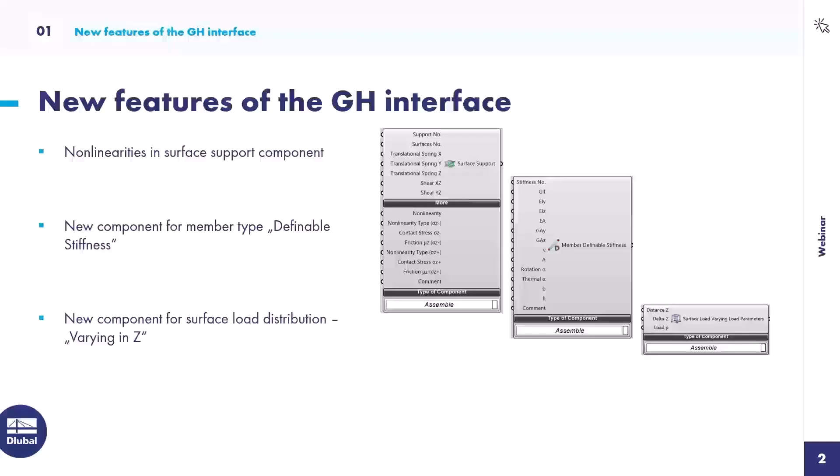The third component is a link to the surface load component. We extended it with the load distribution varying in Z direction. So in case you have to apply a hydrostatic pressure on a vessel, that would be the load you can use, because you can insert varying forces in the global Z direction. We also created a new component for rigid links. All of those features were wishes from customers, so we try to cover them as good as possible.

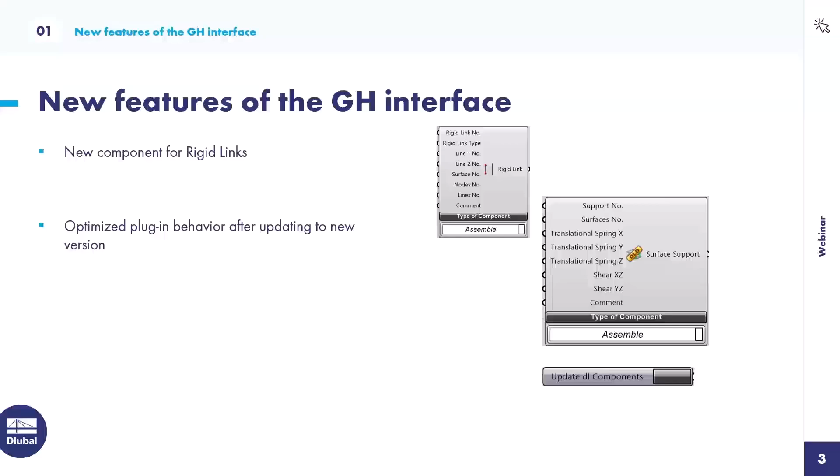And the last feature, in my opinion the biggest one and the one that I'm personally looking forward to, is an optimized plugin behavior when a new version of the plugin has been installed. This is relating to the fact that when you opened an old Grasshopper project with a newer plugin version, it could happen that the connection wires were disconnected, at least for some components. That was caused by the fact that we constantly extend current components and create new components, and when we extend an existing component, those wires have been disconnected, and this new optimized behavior should prevent that.

You get an old tag, you get the previous component shown, you have a new component where you can run an update of the components, and still the wires should remain intact. So that's a good feature for such cases. All right, now this will all come in the next days.

Now let's hop into these sample files. Let me introduce them briefly. As I said, we offer those sample files as download on the webinar page. So you can download them and use them for yourself.

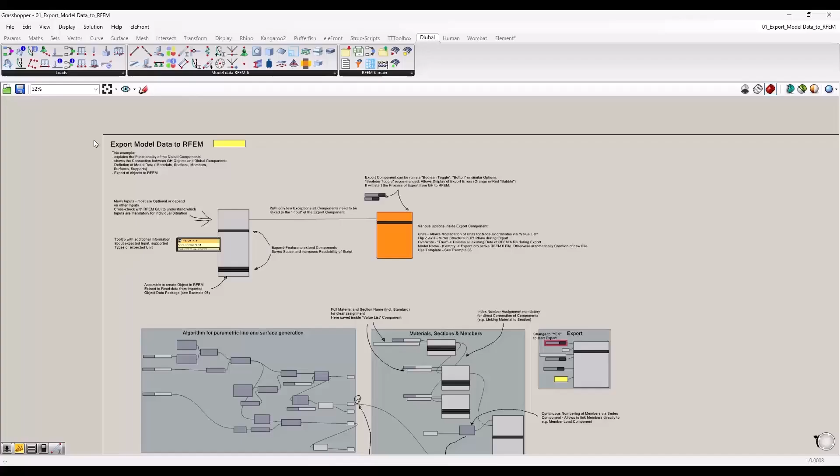Okay, I will open Rhino and Grasshopper and start with the first file. So yeah, this is how these sample files look like. As I said, I'm going to start with the export of model data to RFEM. Maybe before we dig into that, a brief introduction of the plugin itself for those who haven't seen it before.

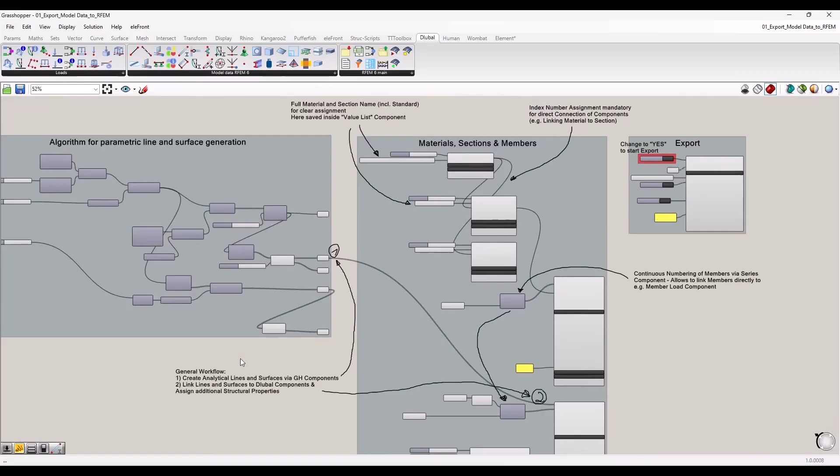You can download our plugin via the Rhino package manager. And after the installation, you get a new tab here, the Dlubal tab. And this one is divided into 3 chapters: the model data components, load data components, and general components. I will focus now on the center group here in this example, and start a little bit with the explanation of how our components are set up, and then also with an example so you can check it, modify it, and so on.

Regarding the introduction of our components, I left some comments in here. In general, our components work similar to other components that you know from Grasshopper. We have inputs, we have outputs, usually just one, depending how you use them. And it depends a bit on your use case what inputs you have to fill. I can't say you always have to use this and that input.

It depends. If you plan to export a tapered member from Grasshopper to RFEM, then you need the Grasshopper line, the section distribution input, section start, and section end, for example. If you plan to export a rigid member, the member type rigid, from Grasshopper to RFEM, then you only need the member type input. So we can't say this is mandatory, this is optional. Here my tip is check the RFEM graphical user interface, what is requested there from you, the user, and then fill the same inputs in Grasshopper.

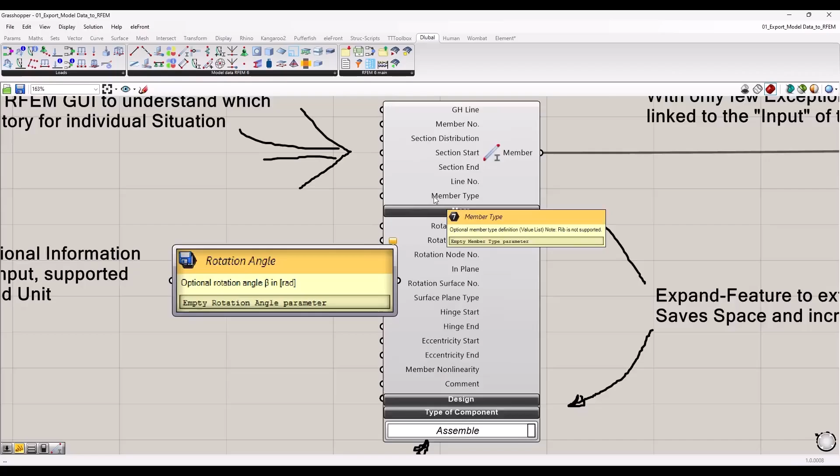We try to give you additional help via the tooltip. So whenever you hover with your mouse over an input, you get additional information. Those tooltips contain information about the expected input, supported types, expected units. For example, for the member type, you could ask what is a member type, what's the proper input for that, a string, a value, and then you can see here value list in the tooltip.

So you can call up a value list, a very often used feature for our plugin components. It will give you the list of options, and then you can simply select the one that you need. For the rotation angle, for example, you get information about the unit. So also check the tooltips as a quick help if you are not sure how to deal with certain input.

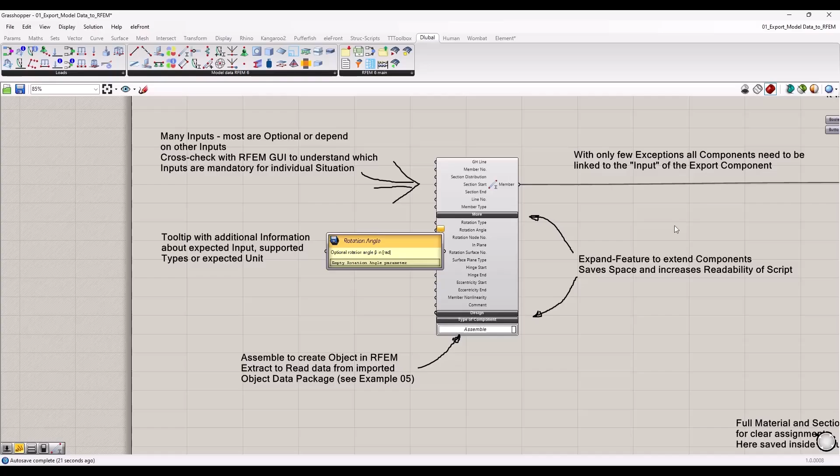We have also an expand and shrink option in our component. Here we have to say thank you to Bollinger Grohmann, Diego Apellániz. They provided us with this code. It's really appreciated and a nice feature because it reduces the space of the components if you only need some of the inputs. It's simply a nice feature.

Concerning the general setup of a script that has the target to export data, you would create multiple components. I have here one for members. You would need additional components probably for sections, for materials, maybe for nodal supports. You fill them with the information, and all of those components then have to be collected inside the RFEM export component. That's this one here.

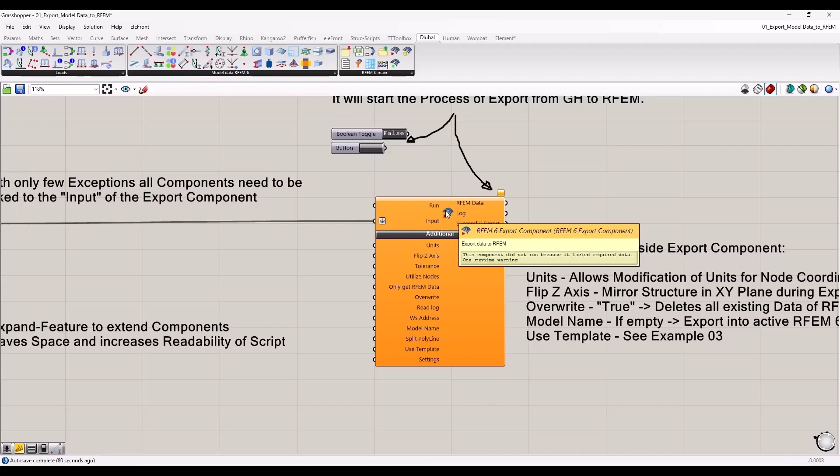All of the components are connected to the input, and then you can run the export by a Boolean toggle, a button, or similar options, which you connect to the run input. My suggestion is using a Boolean toggle. It has two pros. Basically, if you keep it true when you connect it, then you have kind of a live link. So whenever you change something, the export will be triggered again, and you get the result in RFEM directly.

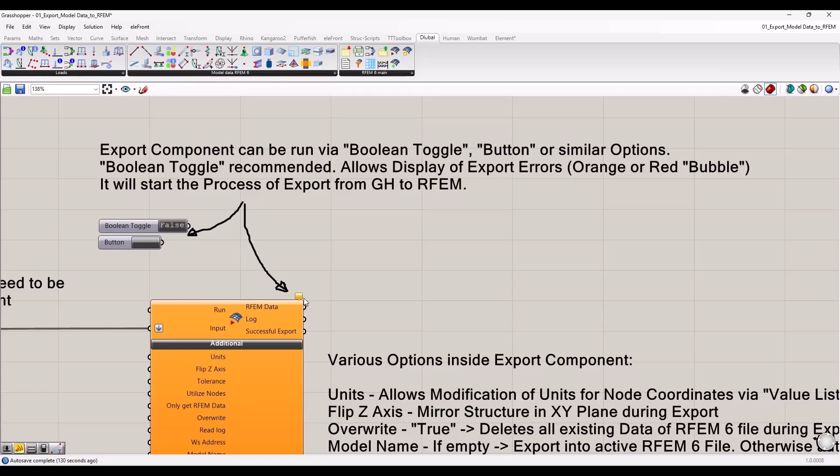And the other big pro is that when you made an error in the input somewhere in your script and you leave it on true, you get here usually a red or an orange bubble, as you can see here. And this one contains an error message. If you use the button, this error message will disappear a millisecond after it showed up. So that's why I prefer the Boolean toggle.

So far regarding a quick introduction of the components. Now we can take a look at this little example down here. Let me show what I did.

I have here a group which represents native Grasshopper components, basic in the Grasshopper program. I create just a little structure, a couple of columns, a slab with an opening, and I collect all of these objects in surface, curve, and node or point components, which I will use later in my Dlubal components.

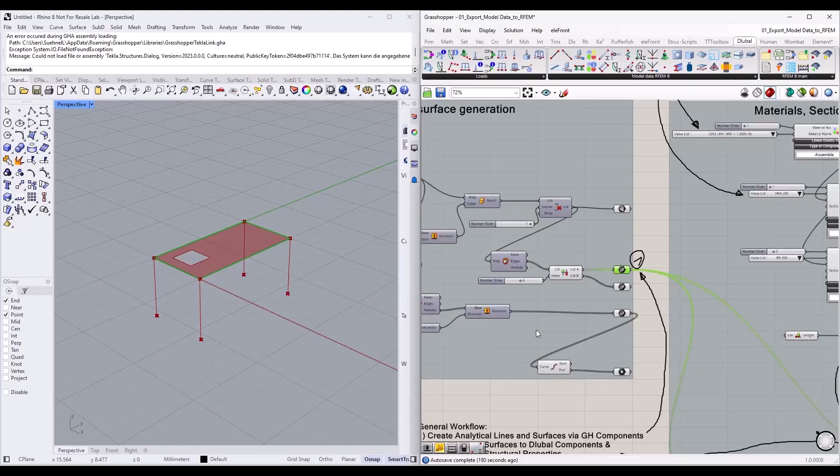How I do that, I will show in a second. If you take a look at the member component, it makes sense to use the lines we just created via Grasshopper as the analytical line, basically start node and end node. So what I'm doing is connecting this curve component with the member component, with the Grasshopper line input.

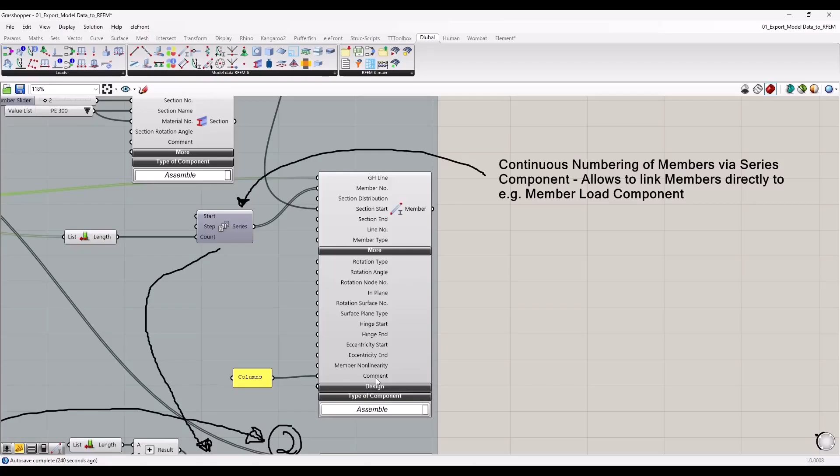Then you have additional inputs to assign the required and necessary information. What section do you want to assign onto that line? Maybe you want to assign additional comments or even eccentricities. That can then be done via direct inputs or additional components.

I also create here a material and a couple of sections in this little example. We often get the question, will you provide a library for the materials and sections as a component? We actually decided against that. The library in Rfem contains hundreds or thousands of materials and sections.

So we don't see the point of having such a component in Grasshopper. It is quite easy to create your own little library.

I'm using here a value list in that little example. You can edit the value list. You fill in - let me use this one here, that's better - you fill in the short name that you want to see when you open the drop down, and then the full name that is expected by Rfem.

The full name usually contains also the standard. So if you document it in that way, you have a nice little library where you can choose those materials that you frequently use.

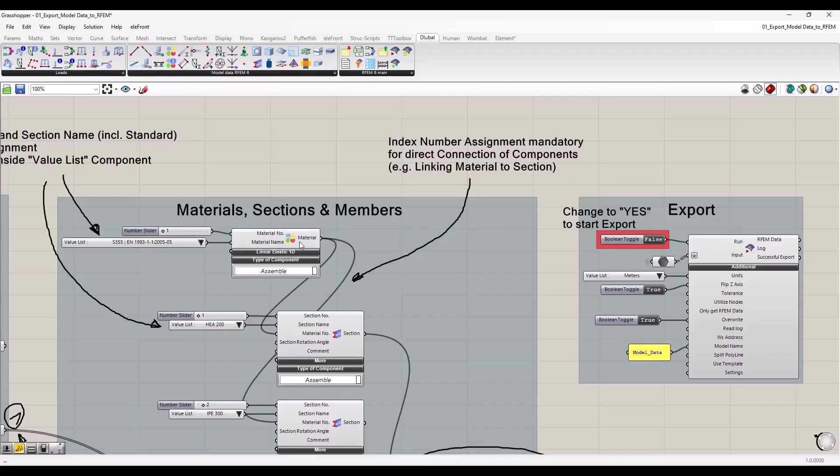Small tips like that are mentioned in these sample files. An important information is also shown here. In my webinars about the Grasshopper interface, I usually connect my components directly, material into the section component, because the material index number is a required input. So it is just logical to connect them.

This connection, however, only works if you assign the index number to the material, because the input expects a value 1, 2, 3, 4, 5 - the index number of the material. This information can only be shared if it is assigned beforehand. That's important - keep an eye on the index numbers of the components.

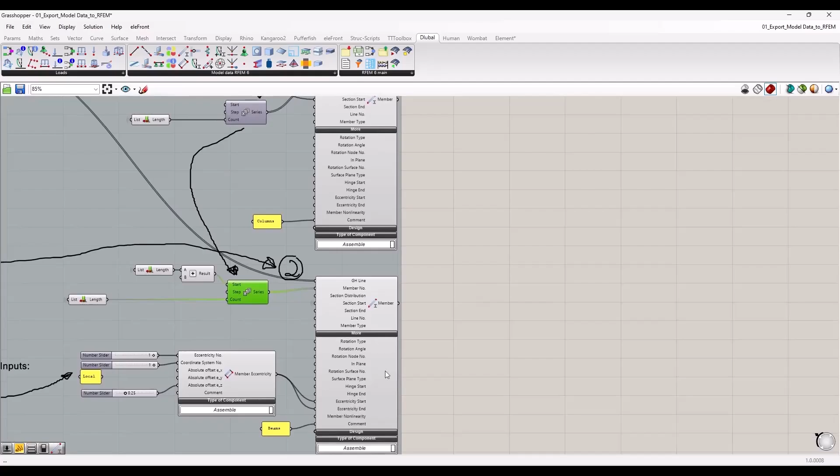It is not that difficult, even if you think about members where you have maybe hundreds or thousands of index numbers. You could use a series component, linked to another series component for additional members, to count the lines you have collected and assign numbers to that. That's quite easy.

That example also creates a couple of nodal supports, thicknesses and surfaces, with additional information on how you can trigger a fixed support, for example. And at the end of the example, we have the export - highlighted in red, the button that you have to press to start this whole example. As I said, a Boolean toggle.

This is what I want to show here as well. Let me quickly run the export from that little file to Rfem. I double clicked on it, and now the programs will communicate with each other. In a second, I should see the result.

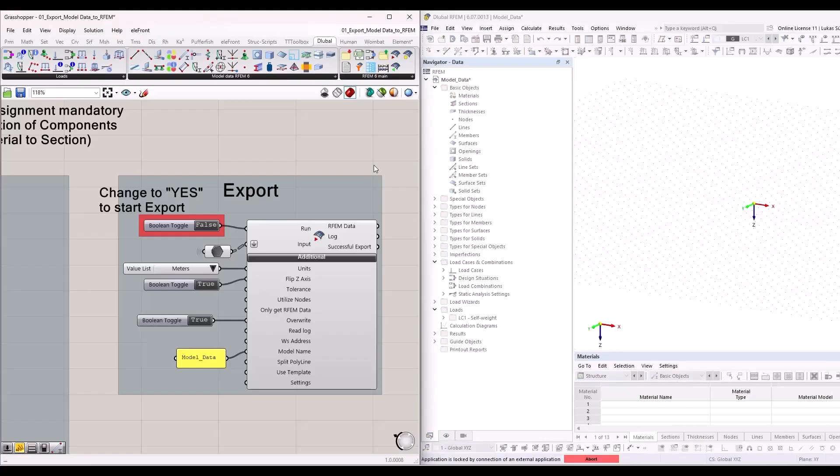Okay, here we are. I stop the export again - I set it back to false. With that, I make sure that whenever I change something, it will not automatically trigger the export again. As you saw, it takes a couple of seconds, and you might want to modify more things before you run the export. That's why I set it back to false.

You can leave it on - that is up to you. And as you can see, the result is clearly visible. We have the same little structure. I have here eccentricities assigned on these members. As I showed before, materials, cross-section, everything has been exported correctly.

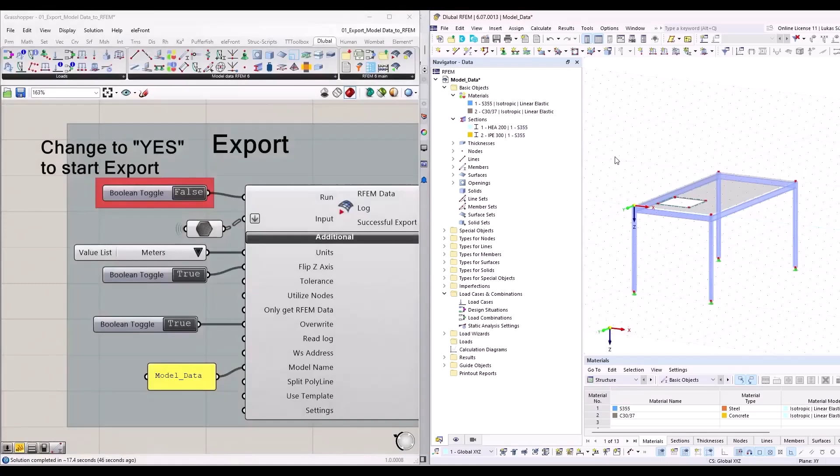The nodal supports - so that is the first little example that I wanted to show here, the export of model data from Grasshopper to Rfem.

All right, let's have a look at the second little sample file, which is about the loading. I could have done it in one, but if you begin with the interface it feels a bit complex, maybe too much information in one file. Therefore, I split it up into two sample files. So that's the one for the loading. I will increase the size again a bit.

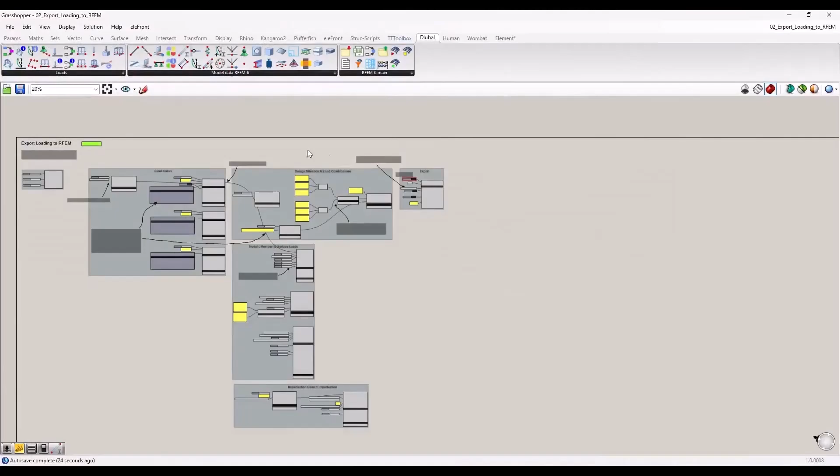As a quick introduction, what we cover here in our loading chapter: you can create load cases via the Grasshopper interface. After the load cases, you can also create load combinations and design situations - design situation, ultimate limit state, serviceability limit state, those types which are required as an input in the load combination. And then you can export these load combinations.

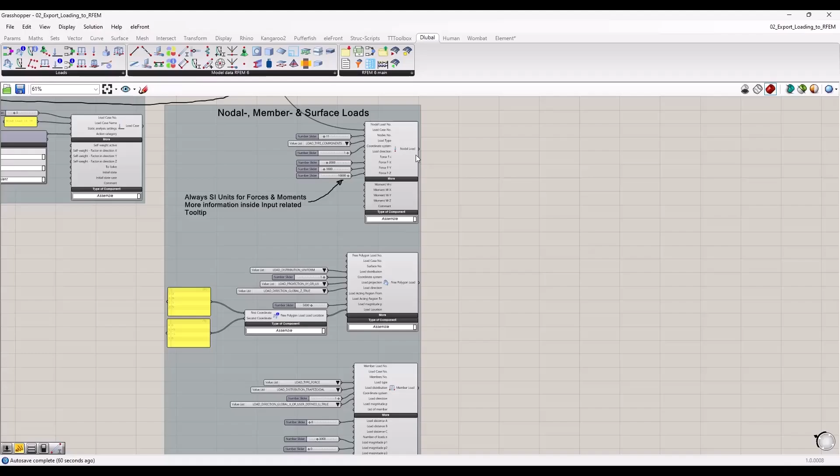Additionally, this sample file covers a couple of loads. Obviously, you want to create loads inside your load cases also in Grasshopper - probably up to you. And here we cover nodal loads, surface loads, member loads, line loads. There are more options here, I just use 3 of them in this little file.

And on the bottom, also a topic which should not be dismissed: imperfection cases and imperfections, initial sway on columns, pre-camber. Depending how you plan to run the stability analysis in RFEM 6, this might be necessary, and you can create it via this plugin.

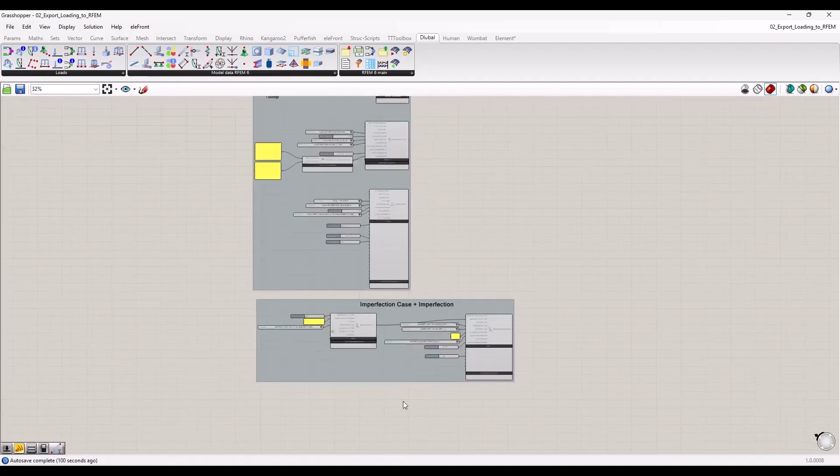So let's have a brief look at the sample file as well. Actually, this second sample file is an extension of the first one. As I said, I wanted to focus only on the load related data or info objects - that's what I wanted to focus on. The rest is still part of this script.

It's however hidden in that cluster file. So if you double click on that button or that icon, you see that behind that cluster we have basically the content of the first sample file.

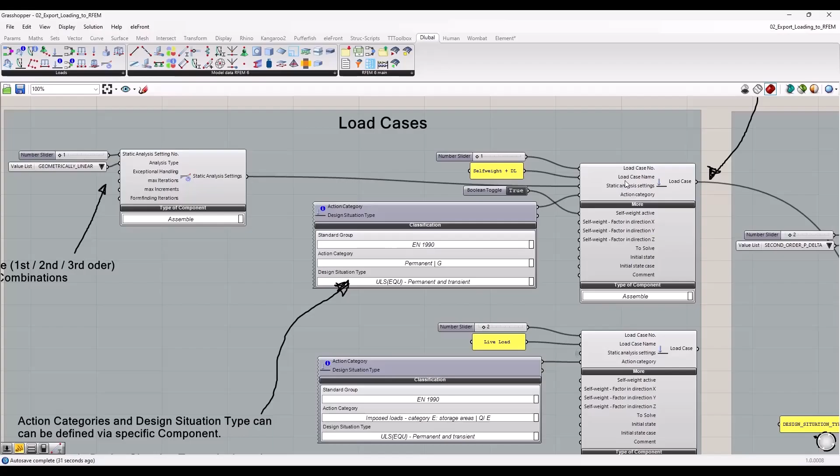Regarding the load cases, I think it's clear that we can create them via Grasshopper. Necessary information, important information, is the static analysis setting - should it be analyzed according to first order, second order, and so on? That's an additional component, it is shown here how you can treat it and handle it.

Another important input for load cases is the action category. Basically, is it a permanent load case? Is it a live load? In case of a live load, according to Eurocode, is it a group A, B, C, D, E live load case? There are different options that you can select via this classification component.

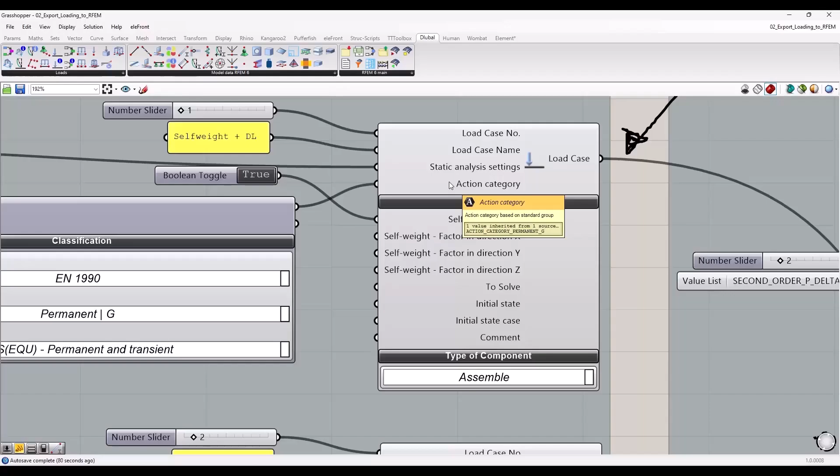It's like a little library, because the expected input for the action category is a relatively complex string text. You can see it here in the tooltip: action category permanent G. That is nothing which you know directly - you don't know how to input that. That's why we create these strings via this component.

This is how I set up load cases. I fill these load cases with loads, as I showed before. Here, maybe as a comment: any value that you have to input into our components usually is related to the SI units - so meters, Newton - as a simple example, most common stuff.

You cannot change these units into anything else, so this transformation can be done via a little recalculation if it's required. You can easily use a multiplication component, assign the proper factor to convert a pound force into, I don't know, kilonewton related unit, or SI related unit. So that can be done in Grasshopper, and here as information we always expect SI units. I documented it again in the tooltip, as you can see here - Newton, or for moments Newton meter, for example. That's also why I'm using high values here, 2000 Newton for 2 kilonewton.

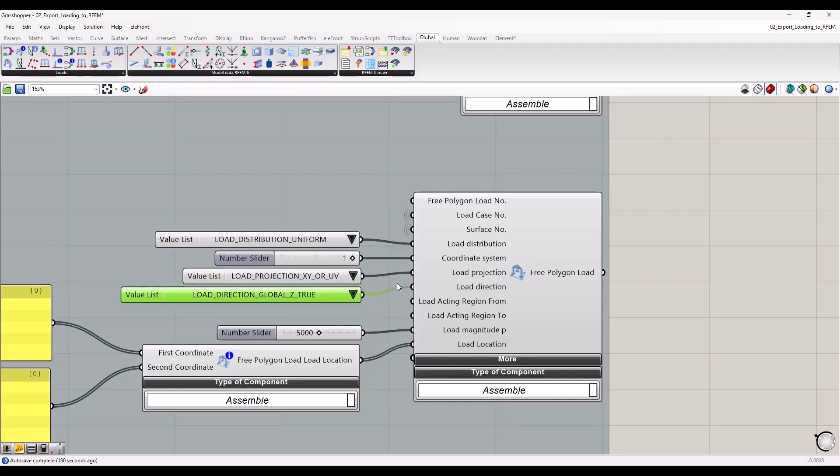Also, I hope it's obvious - if you deal with the load components, we use a lot of value lists here to define the proper load. There are various ways how to create a load, and most of these inputs can be defined via value lists. All right, so far regarding the loads.

The load combinations can be built manually via our plugin. This component is basically divided into subcomponents. We have the general load combination component.

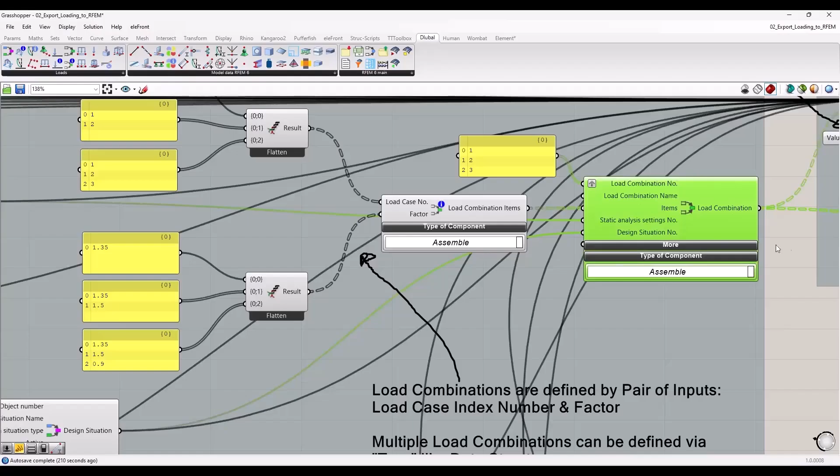Here you can assign the static analysis setting, you can assign a name, you can assign the numbering, and more settings as well. The actual combination is done in a second component, the load combination items component. Here you combine the load case index number, so load case 1, 2, 3, depending which numbers you assigned to your load cases.

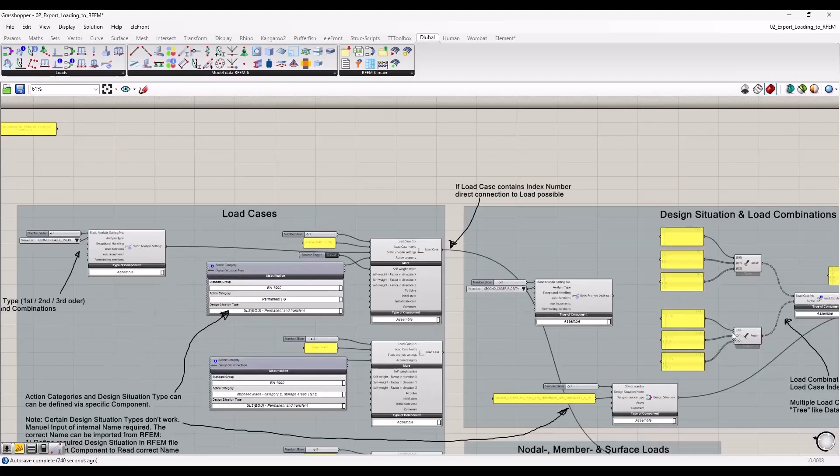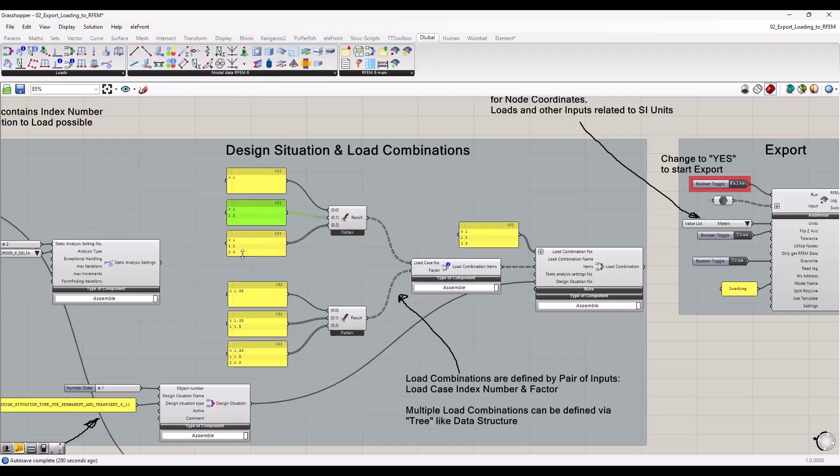You combine that with the factor, 1.35, 1.5, 0.9, whatever is needed, and this combination can be done via little lists. The first load combination that usually comes to mind is dead loads multiplied by a factor - load case number 1 multiplied, based on the Eurocode, with the factor 1.35. The next combination is dead loads plus live loads: dead load case number, live load case index number, 1.35, 1.5. That's how you set up multiple load combinations via Grasshopper.

If you have all that, you can connect it again to our export component, same logic. Here I used a little data component in front simply because, to connect these components, sometimes you have to zoom out and draw lines from here to here. So I have this little data component which I move to the place I need, for an easier connection. That's all about it - it's not required to do it this way.

Let me also show that export. Again, we run the export by double clicking on the Boolean toggle. Wait a second. All right, export is done.

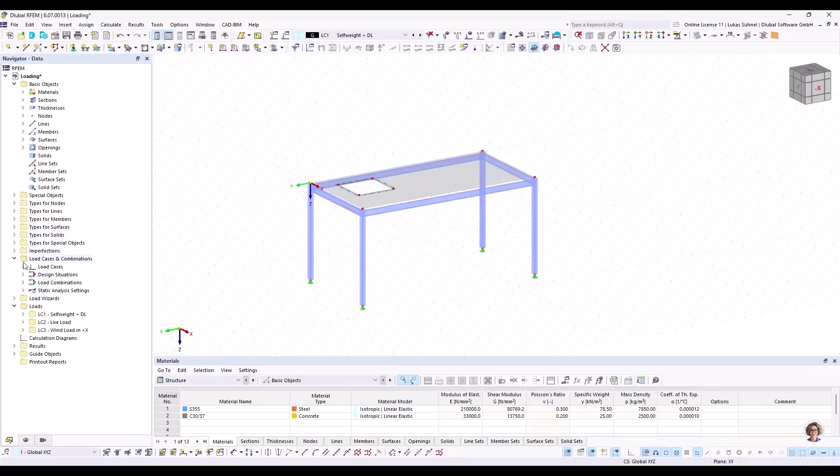Let's have a look - same structure. That was all part of this cluster file. New is the load cases, the design situation, the load combination - this has all been created via Grasshopper. Also the imperfections, as we see here, or the loads, node load, surface load, and also wind load as an example. All right, so far regarding the second sample file.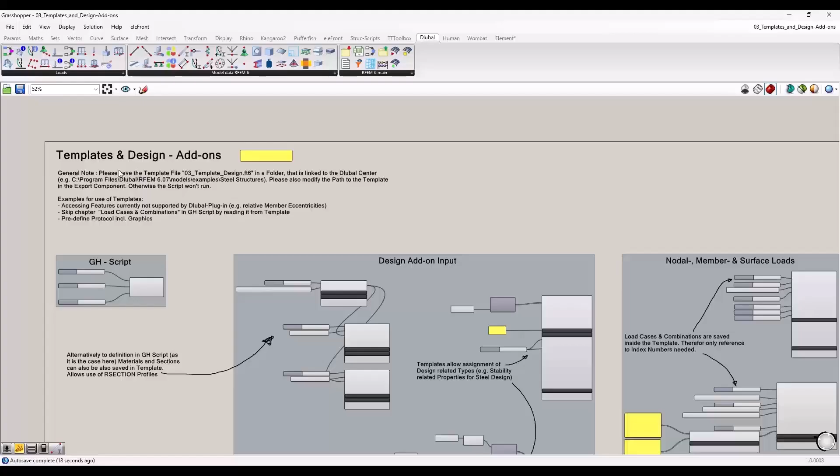Now let's have a look at the third one. The third one is about using templates and how to control the design add-ons. So the first sample file showed how you can export model data, the second sample file showed how to export loadings. I think it's quite clear what we can do in general, what features we cover here.

Now templates is a complete additional topic, I would say. It's really a strong feature which you may or may not know from RFEM 6 or previous versions. Let me show it maybe in advance. Think of the following example: if you analyze or design the same kind of structure again and again, maybe you have the same kind of load combinations, or your protocol always looks the same, the same graphics are included and so on - then you don't have to do it every time from scratch. You could use a so-called template.

You create such a file once, so you would create a new RFEM file where you define all these settings and properties that you want to save in such a template file. Then you save it as a template, and whenever you create a new file afterwards, you can refer to that template. So basically you create an empty file in which the information from that template file will be imported. Let me show that as well. As a result, your file is not empty anymore - you get these load combinations, the protocols, maybe even materials and cross sections, whatever comes to your mind that you want to have as a default in a new file can be saved in a template, and that will be imported afterwards. Takes a moment.

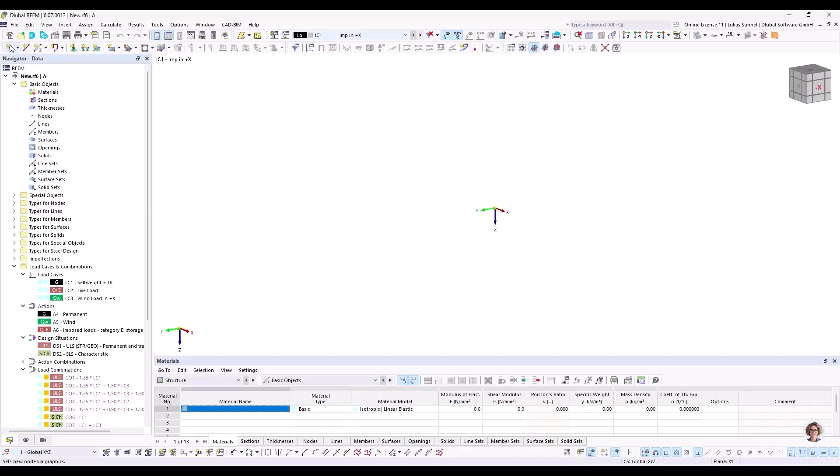Little spoiler, it contains graphics as well. So yeah, that is a feature that we can use manually in the RFEM graphical user interface. And we also have access to that via Grasshopper. Creating such a template is manual work in RFEM, but once you've saved it, you can also use it in Grasshopper.

You basically just link the path to that template to our export component in the use template input. That's all you have to do. Then the template will be preloaded into the file that you create with your normal export. And one thing that is quite important for that workflow: you should not use overwrite during the export. That would overwrite the data that we import with the template, which makes no sense in that moment. So make sure to set it to false.

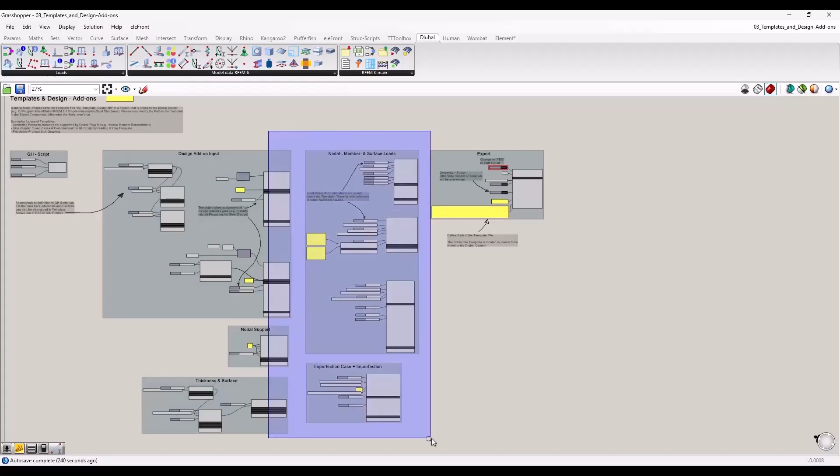And then you can use those types, the information that you have in the template, in your Grasshopper code. And how can you use that? Well, let's go back to the example with the load cases and combinations. Let's say you don't want to create these load combinations manually in Grasshopper, as I showed before. This whole chapter is missing in this example. I have some model data and some loads, but the load cases and combinations have been skipped. They're part of this template file.

And if I now create a new load, a node load, a member load, whatsoever, I need as an input the load case index number. Load case 1, 2, 3, 4. So all you have to do is assign the index number of the load case this load should be placed into. Obviously, this requires knowing which load case has which index number, but that is okay, I guess.

Where else could templates help? They can also help you access features that you can't control via the Grasshopper plugin. For example, currently our member eccentricity component only allows generating eccentricities with absolute values. In RFEM itself, I can quickly open a file, we have additional options. We can define eccentricities as relative. We could say the eccentricity should always be the distance between the center of gravity and the top flange or something like that. Let me show that in a second.

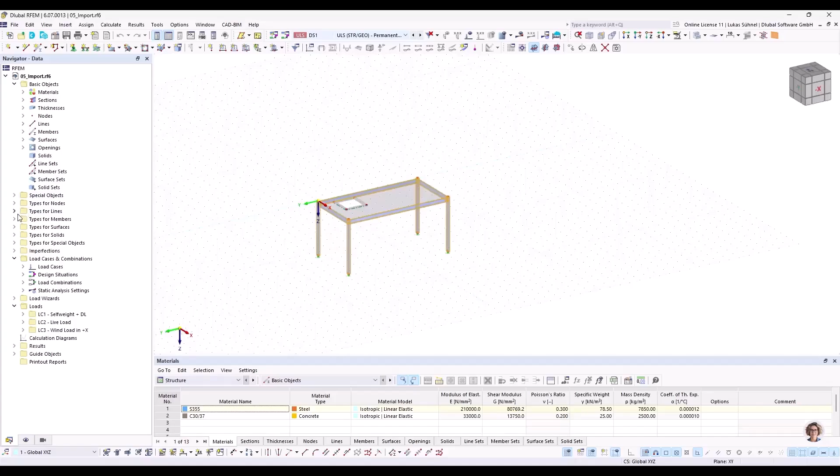Okay, if we think about member eccentricities, then instead of just absolute values, I have additional options in RFEM. I could, for example, create an eccentricity which is relative, so depending on the cross-section size, it will always take half the height as the eccentricity. And I can save these eccentricity types inside my template and then use them in Grasshopper. So instead of creating the eccentricity manually and assigning it to the member component, I could just assign index number 2, which is the relative eccentricity, to my member component. So templates also allow me to use features that are not covered by our current plugin.

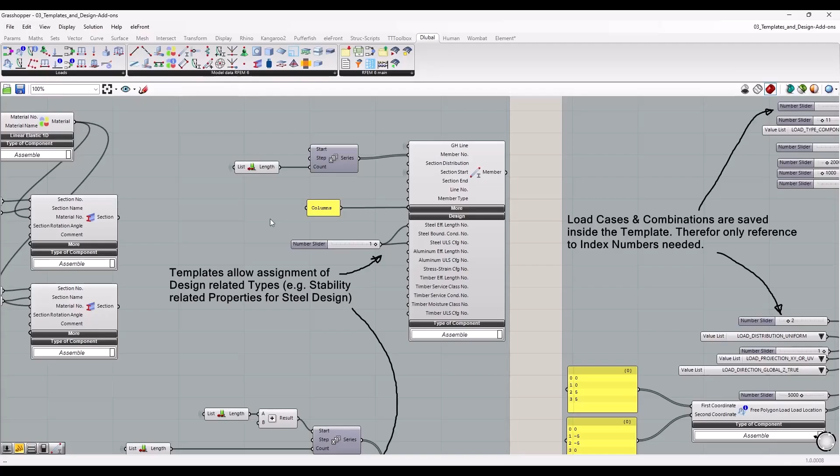Just another example, you could skip the whole generation of materials and cross sections. You can save them in a template and just assign the index number into the section inputs of the member, for example. And the last feature that I want to mention is the control of the design properties. Let me show that again in RFEM.

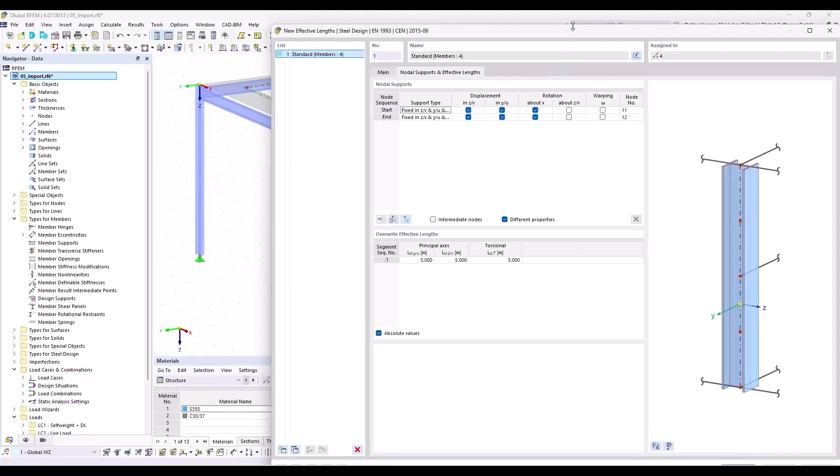Let's imagine we want to run the steel design in RFEM afterwards. For the steel design, we have to define additional properties. What's the buckling length of the column? That's a property inside the member dialog, design types. Here I can say perform flexural buckling, lateral torsional buckling, and so on, all these checks. And then use as a buckling length, maybe length XYZ, 5 meters. These inputs are relatively complex for a Grasshopper component. And as a quick solution, until we have them as a component, we thought of the following.

You could create these types in advance in RFEM. You could create an effective length type for a single span beam, supported at the start and the end, which probably covers 70% of the cases. Then you could create a couple of additional types, maybe one with an intermediate support in Y direction, maybe with 2, 3, 4 intermediate supports. So you could create multiple types, save them in the template, and then use them as input in Grasshopper.

Same logic. In the template that I have used here, which is also provided in the download folder, I have multiple types. I have effective length type 1, which is a single span beam, I think, and an ultimate limit state configuration.

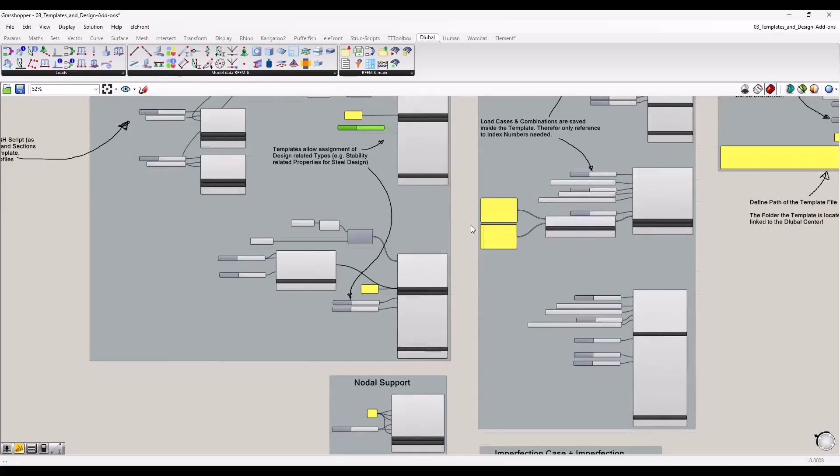In both cases, for those members, I want to use type number 1. Here I switched it up. I used the second ultimate limit state configuration in this second group of members. So that is how you can assign design-related information inside Grasshopper already. And then you again save time in RFEM. That's the purpose of that.

That is, in my opinion, what speaks for using templates. Additionally, this part with the protocol, which you can also save inside the template, so you can skip generating it manually in RFEM. It can already be imported via the template. And now let me show what I did here.

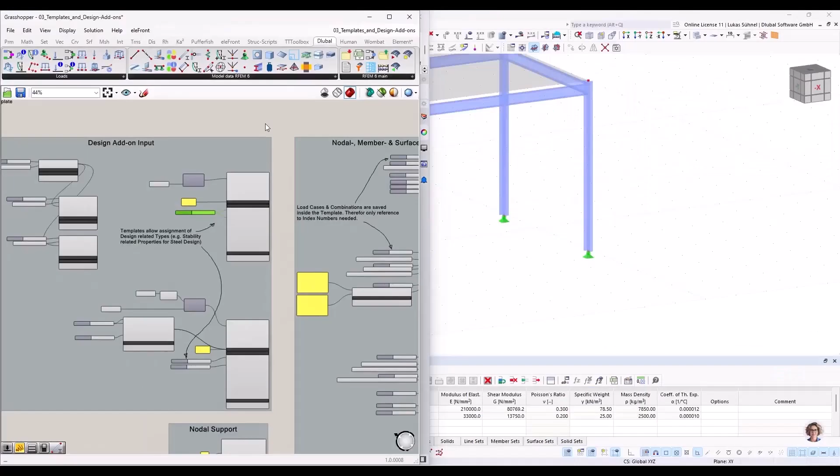So I will close the RFEM file that I have again, put it on the right-hand side, run the export, and I'm basically creating the same file that I had before in sample file 2. I just skipped the whole load combination and load cases part. That is part of the template. And I also have a protocol included in here. Let's wait for the result.

It's a bit slower due to this webinar software. All right, now it should be finished.

Okay, so we see the same structure again. This time, however, with more load combinations, the ones that I saved in the template file. And then again, I was able to use these load cases for my loads. I assigned all of this information in Grasshopper. Additionally, I have assigned design-related information onto my members.

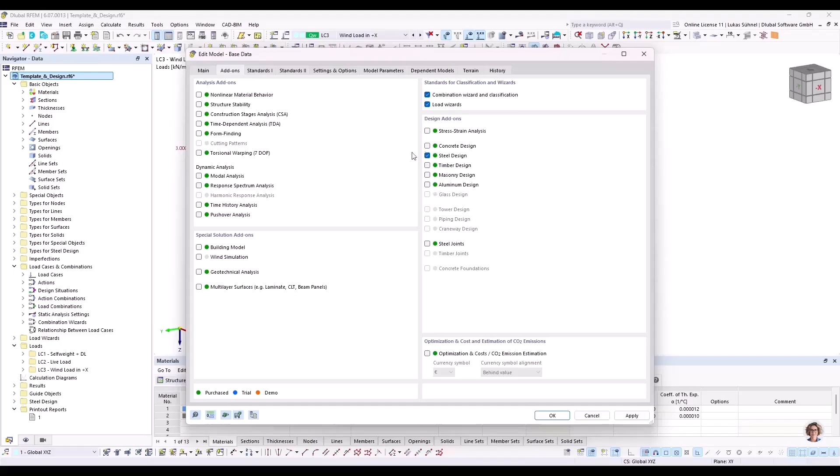First of all, inside the template, I was able to save which add-ons should be activated. We currently have no control over that in Grasshopper. There's no component where I can say, please activate steel design. This is information that has been saved in the template, as well as which code should be used and which national annex.

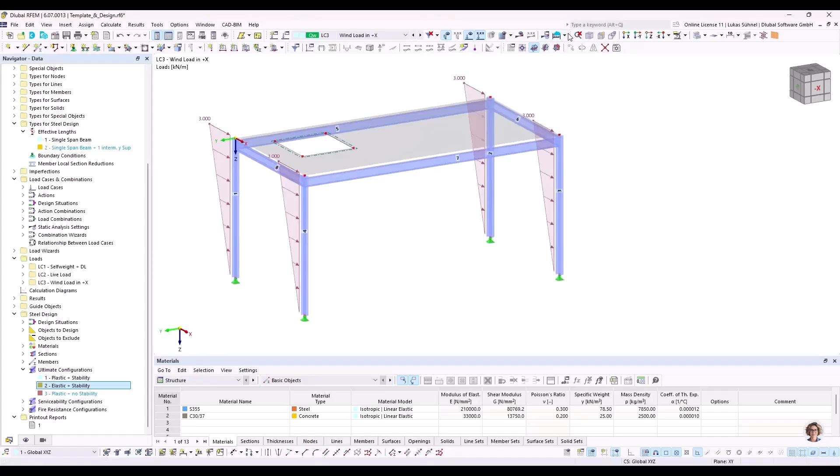And then additionally, as I said before, I created a couple of effective length types. I used only the first one, I think, on those members. The single span beam type has been assigned directly via the plugin, and also design configurations, which we can find down here. I created multiple in my template, and I'm using plastic and stability analysis, elastic and stability analysis, so various types that I assigned via Grasshopper. And then I can run the analysis. Let's quickly do that.

There is also an option while it's calculating. There are two options: calculate locally and calculate in the cloud. That's kind of a new feature. So when you have big files which require a lot of power, an alternative could be to send the calculation file into the cloud. There are different PCs with different numbers of cores that you could use.

And then it will notify you when the calculation has finished, so you can download the file with results again. In the meantime, you can work on something else while it's calculated in the cloud. If you do it locally, your PC might be very slow due to the multi-core use of the calculation. So just as side information while we were waiting for the results.

Okay, so the file is calculated. What I wanted to show is that since we were able to define all this information in Grasshopper already, I now also have results for my steel design ready here. And all I had to do was run the calculation in RFEM after the export. And I have my results ready here, as well as the protocol, which I mentioned a couple of times, that I saved in the template. I can open that.

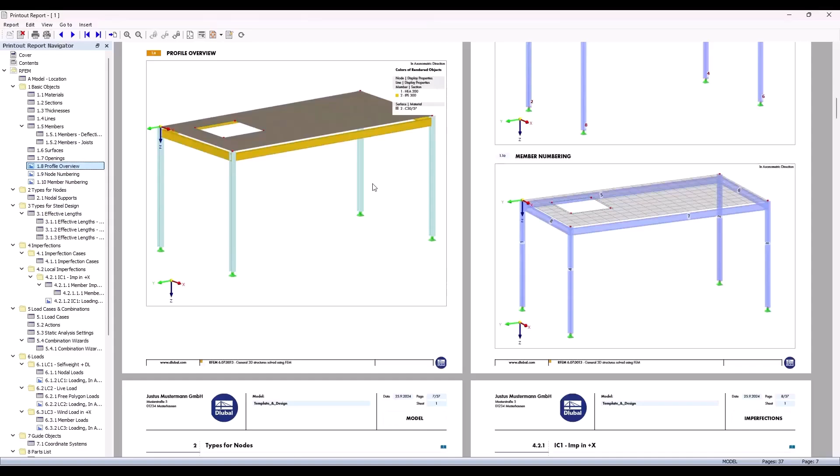So these are all graphics, for example, that I included in the template, and I have them here already without manual modification. Load case related graphics, and even one for the design result. So templates in general for RFEM could be a big help for designing the same kind of structures again and again, or in daily work in general. And it's also a big benefit for the Grasshopper interface as well. Okay. So much regarding that.

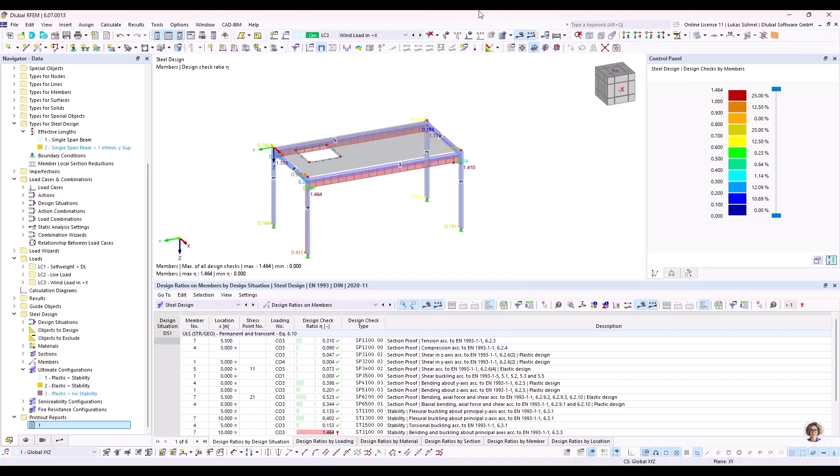Let me go to the next sample file, number 4, which is about anything, as I said, that comes after the usual export. You create model data with Grasshopper or RFEM, then you create load cases, the combinations, you define the loading, and the next step usually is to deal with the mesh, mesh settings, and then you run the calculation, then you somehow deal with results, and this will be covered in here.

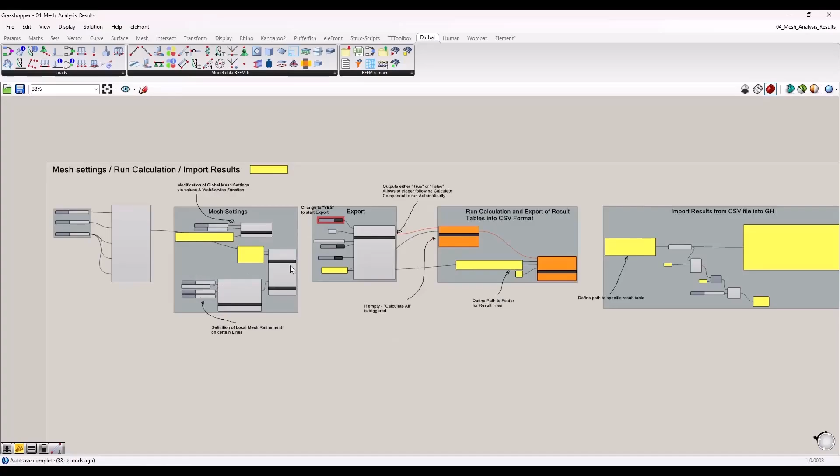Different groups here. Again, it is built up on the previous example. You can see here that that's the code for the model data, for the load data, and so on. I wanted to set the focus on these additional topics. So the first one is about the mesh settings. We have here, for example, a component for the global mesh settings. What should be the target length of the finite element in general, and so on.

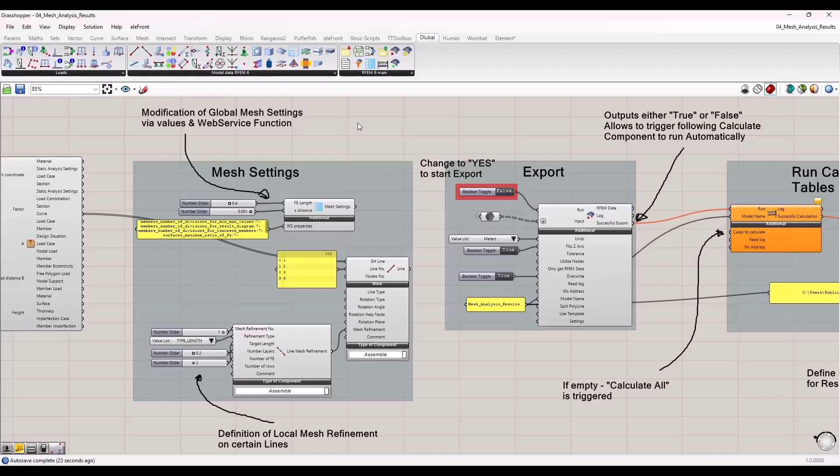And then we have additional components here represented by the line mesh refinement to refine the mesh on specific objects. For example, on certain lines, but we could also assign a nodal mesh refinement or a surface mesh refinement. So various options how you can manipulate the mesh via Grasshopper. And then the next step would be obviously to calculate that structure. Again, all these components should be connected with the export. And then you can run the export to RFEM and you have a proper mesh, which is nice. But before we do that, I want to cover also the next steps.

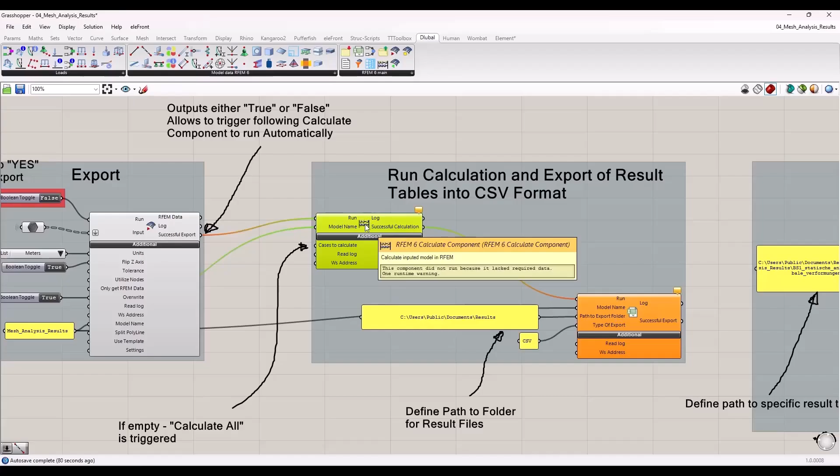Instead of running the calculation manually, as I showed it before, you can trigger the calculation also via a calculate component. Here you can decide if you want to analyze only specific cases, just specific load cases or combinations, or if you leave that input empty, then calculate all as a function is triggered in RFEM.

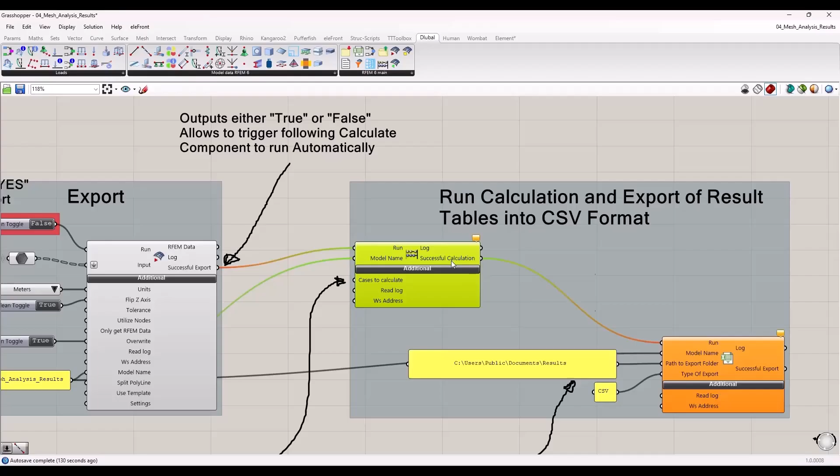How does it work? That's maybe worth mentioning. It is kind of like a stepwise export. We start with the regular export of the model data, load data, and mesh information. Whenever this export is ready, it will give us a Boolean parameter, a true. It will output here true, and with this true information, I can run the calculate component. And when the calculation is finished, I get again a true output here, and with this I start the export of the results.

That's another component part of this chapter here. Here I can export my results into CSV or XML files. And you only have to specify the location of the folder you want to have the results in. When the export is finished, you can read the content of these files. This is, however, pure Grasshopper components, so this is not specific to RFEM. That's a read file component from Grasshopper, and then just some data handling to get maybe one specific value out of that whole file.

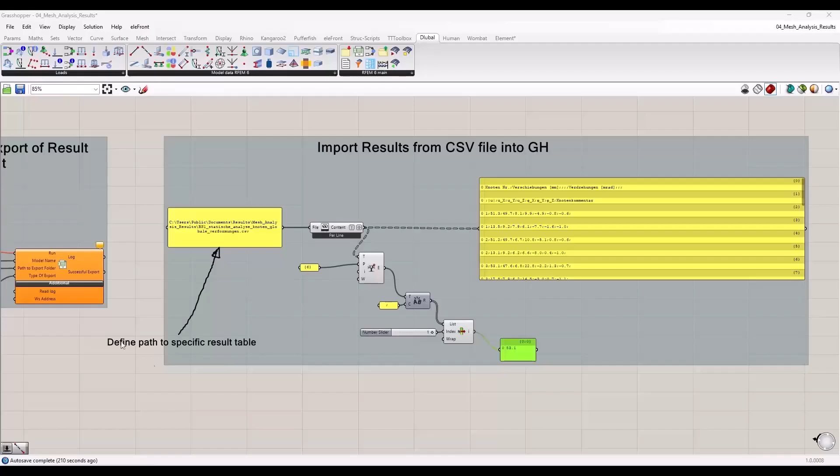And to show it, I quickly want to remove the existing results, which I forgot to do, because that should be empty here now. Just let me delete the folder. Public results. Oh yeah, sorry. Now it should be empty in a second. Okay, I just deleted the existing results. And now you can see that, of course, this script is failing. There is no such file. And I want to show the process now live.

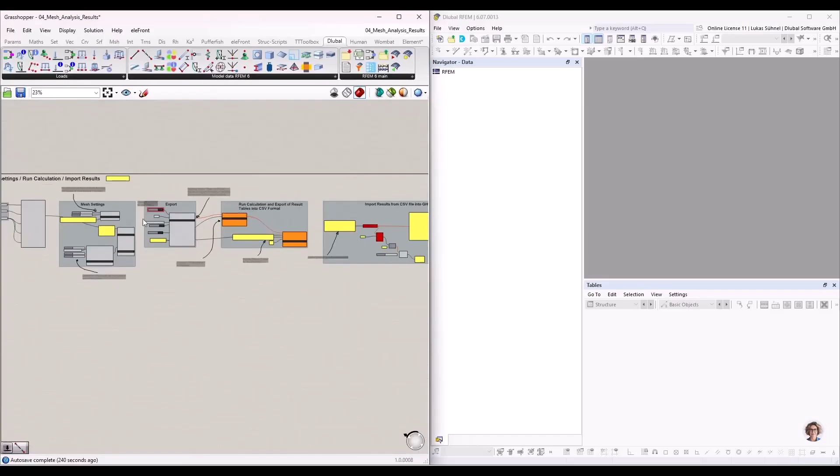Therefore, again, I will run the export first. And this is now a stepwise export. You can see that on the bottom of RFEM. It will run the export of the model data, load data, and so on. Then it will make a little pause. Now it's running. Then after that pause, it's starting to run the calculation. You can see that mesh generation and calculation in a second, without the dialog, by the way. You don't get the dialog if you start the calculation externally. And then again, a pause to export the results.

That's how it's done currently. And currently, we also export all result tables; that can also be controlled inside a template. You can select which result tables should be generated, so you don't have to deal with all the result tables always. So now the export is done. I can cancel this whole process. And what I have to do is, because this is the English webinar today, my tables are named slightly differently. So I will change the name of that path here.

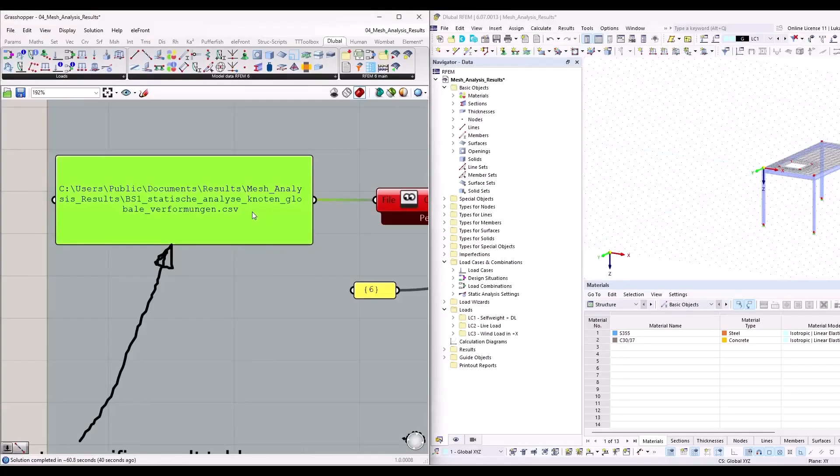So I can show it even. So these are the CSV files that we now received after the export, and I can use, for example, copy. I can use this one, replace it here. Oh, that's working correctly. Yeah, looks good.

And then I have here the results, the global deformation on nodes as a result table in Grasshopper. And with a bit of filtering, I get the maximum nodal deformation. Yeah. That is the fourth sample file.

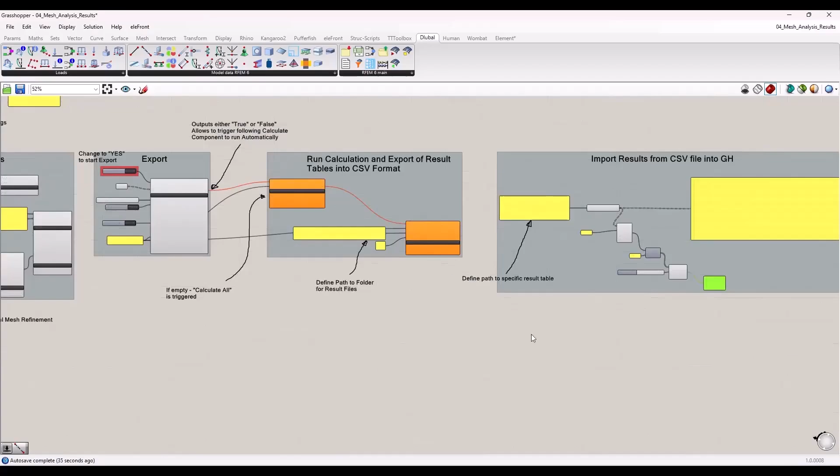You could think about additional features now. You might say, okay, hey, if I have a result in Grasshopper, I could maybe use additional plugins like Galapagos to run calculation loops. I showed that in a different webinar briefly as well, but that is also possible.

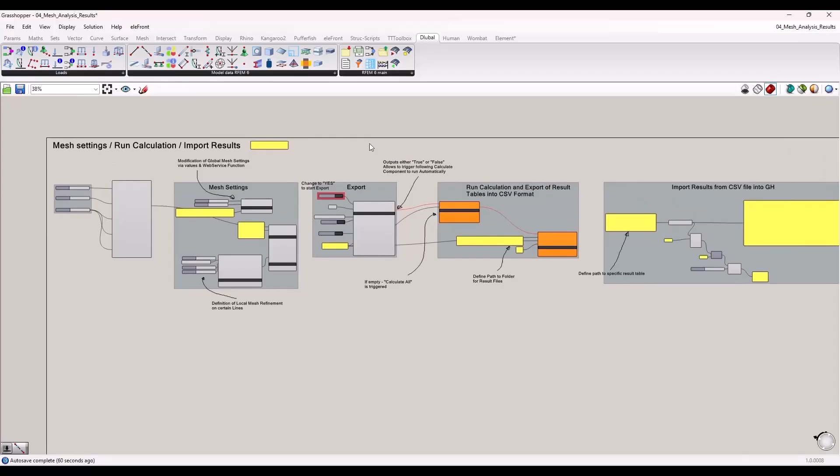So you could say this is the target value which you want to optimize. You want to reduce the deformation, and as a manipulation, it should manipulate the height of the structure, the length, whatever, and then it could run automatic calculation loops. Just as an idea. Okay, so far regarding the fourth example. Let me close everything again.

And then we turn the way a bit around. Now I open a file in RFEM 6 in advance, and I will open also the 5th sample file. And this one is about importing data from RFEM into Grasshopper. So the other direction basically is also possible. Instead of the export component, you have also an import component. And with the import component, you can read information from RFEM into Grasshopper.

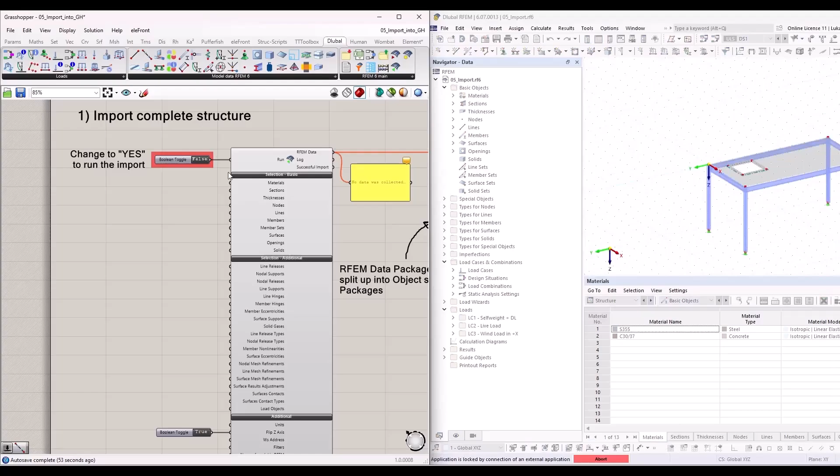Let me double check. Yeah, still waiting for the file to be opened. Okay. So let me put that on the right-hand side. It's the file that we created before. That on the left-hand side. And basically we can run the import again via a Boolean toggle. And here it's basically required to use a Boolean toggle because it has to stay active.

So I imported my data and I get an RFEM data package. That doesn't help me at all in the beginning. So I split that global data package up into object-specific packages. That's this RFEM data component. And I still have unreadable data packages, so-called GH objects or containers. And I can read the information from the section package via my section component.

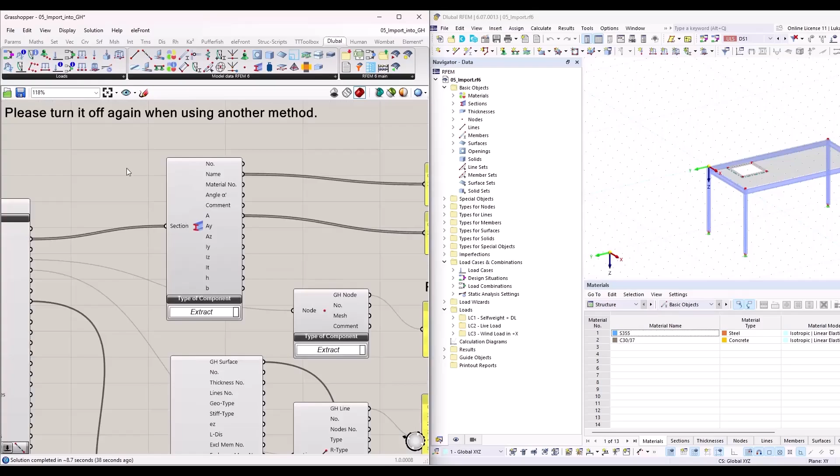And this is the same component that we used for creating a section. And I can switch it around from assemble to extract. So it basically mirrors the inputs and the outputs. And then you get the results that you expect, the names of the sections, maybe here the area of the sections in square meters, SI units always.

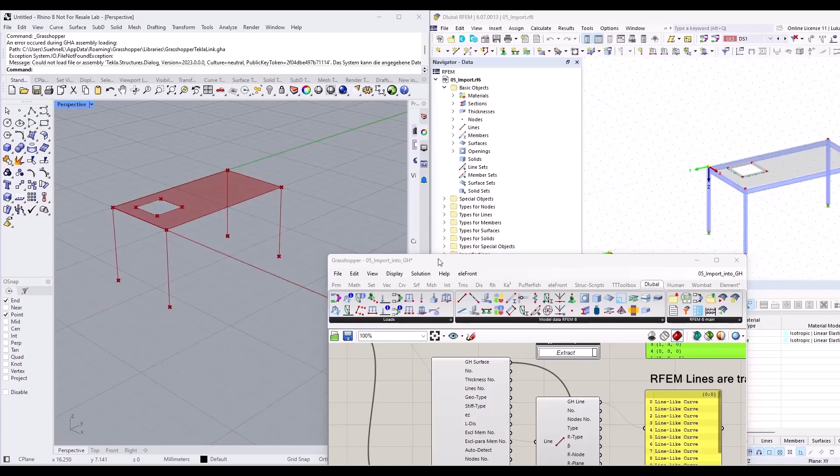For nodes and lines, you get also real Grasshopper nodes, real Grasshopper lines, and also surfaces. So what you can see now in the viewer of Rhino, I basically imported the analytical lines and surfaces from RFEM into Rhino or Grasshopper. You can bake them and use them somehow if you want, for example. So far regarding that.

We can modify the import a bit because now I imported everything. That is maybe performance-wise questionable if you want to import everything. Depends what you plan to do with that. You can also import only specific objects. You can use Boolean toggles to tell the import component, import only nodes and lines and skip the rest. So then the import is much quicker because it only has to read a couple of information, not all of them.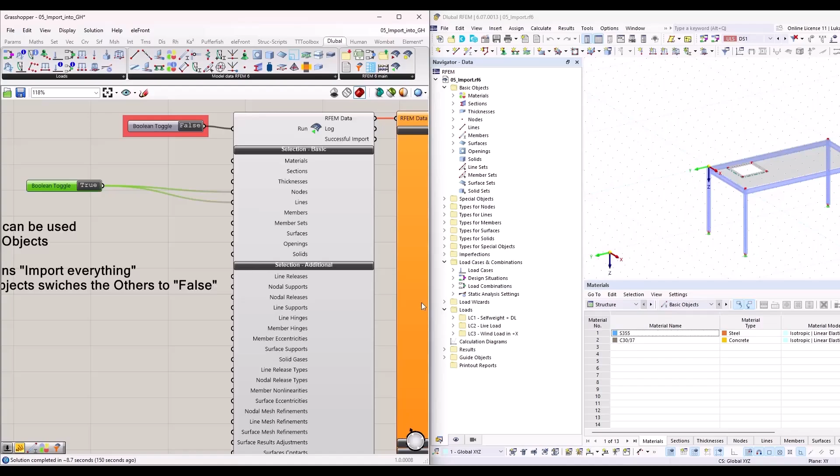So as soon as you assign a true command to any of those inputs, it will only import that, and the rest will be set to false. If you don't assign anything to these components, everything will be imported. That's the logic here. And then again, we split the information up. Let me quickly show that.

And we see we imported the nodes again, the lines again. I skipped the surfaces this time. And we can also see that other information won't be shown, sections, because I simply did not import them. All right. Then we have also filter options.

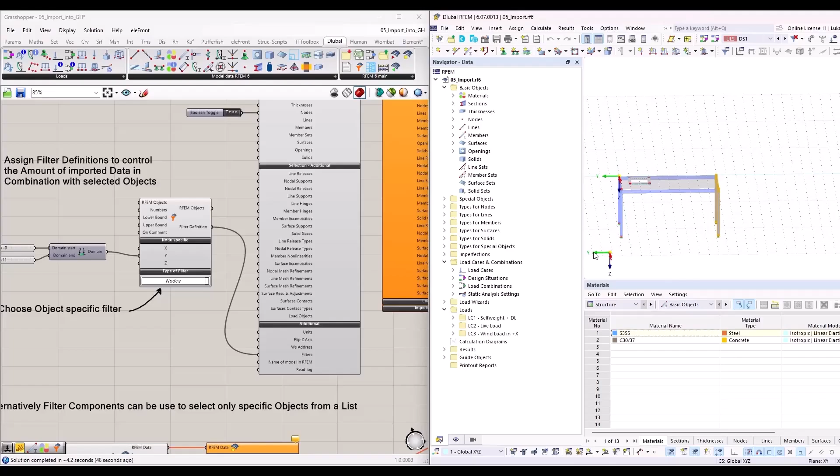I can use them before the import or after the import. These are the next two examples in that sample file. I have here a filter component, and with that filter component, I can specify in more detail what object I want to import. Again, I want to import only nodes, but not all of them. I'm just interested in the nodes of the frame on the negative y direction side for some reason. I only want to import those four nodes.

So I use my filter here. I can again switch between certain types, and I can say, please import the nodes with the y coordinate between -9 and -11. And if I do so, I should get only 4 nodes after the import. That's the case. And as I said before, I can also use the filters afterwards.

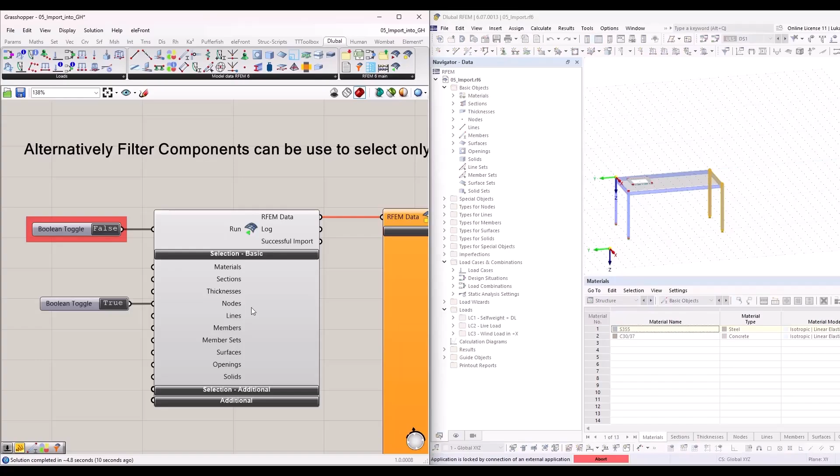So let me run the import here as well. Same example, I import all the nodes. Now really all nodes, but then I want to split up the data package for my nodes. Maybe for some reason I have a couple of branches here. I need these 4 nodes again, the same ones that I used here from -9 to -11, for something else, maybe to create a surface or whatsoever. And then you could use other nodes, again with the filter component,

to do something else. So with those filters you can sort the imported data afterwards, and if you place the filter in front with the filter definition, then you can control the amount of imported data. So that is the import from RFEM into Grasshopper.

When would you need that? Well, an example or an idea a checking engineer explained to me in a call. He said he thinks about using Grasshopper as a converting tool. Checking engineers deal with different structural programs. They have the task to design the same structure in a different structural analysis program and to convert the data. His idea was to create a tool in Grasshopper. Usually all programs have Grasshopper plugins.

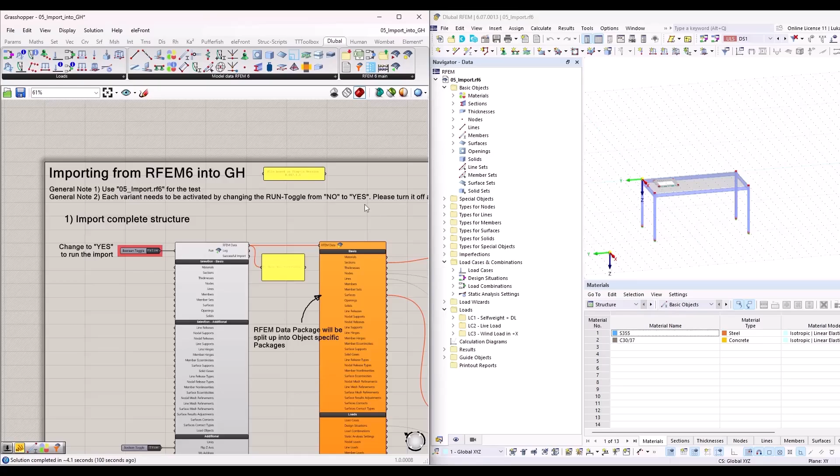So just as an example, he's getting the structural analysis from the structural engineer in Dlubal. Then he imports the information from RFEM into Grasshopper, extracts all the necessary information and then connects it to, maybe, the SOFiSTiK or the SCIA plugin to generate the SOFiSTiK or SCIA model based on the RFEM model. That is an idea. You may have others as well. We offer just a feature here, and we are interested to see what our customers do with it.

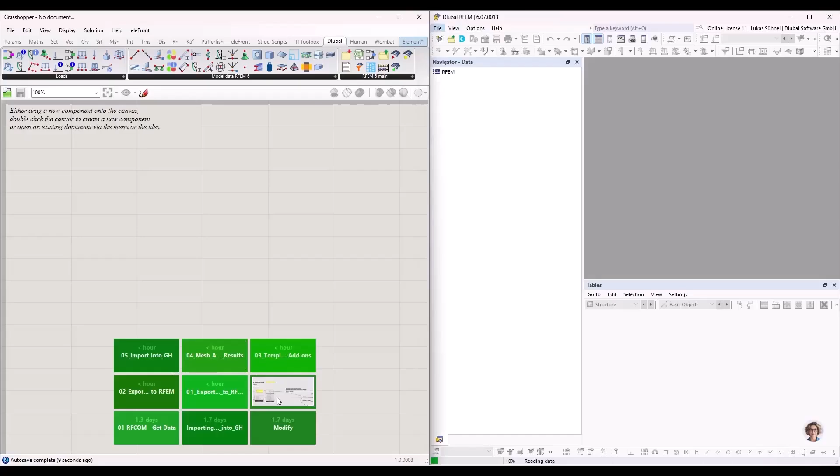Okay. Example 5, the last example, and then we are already done for today. Actually, I can leave the file open. The last example is about the modification of an active RFEM 6 file. Imagine you have a structure. You created a structure in RFEM, and for some reason you want to modify certain parts of it, maybe parametrically. That's why you use Grasshopper. That can be done, and I have here again a little sample file that is covering 2 tasks.

Let's say the first task should be to modify these 2 members, member number 5 and member number 7. We want to assign hinges at the ends, because they're connected to the web of the column. Then we can do that. And the second task will be to move the opening. So let me show how that can be done.

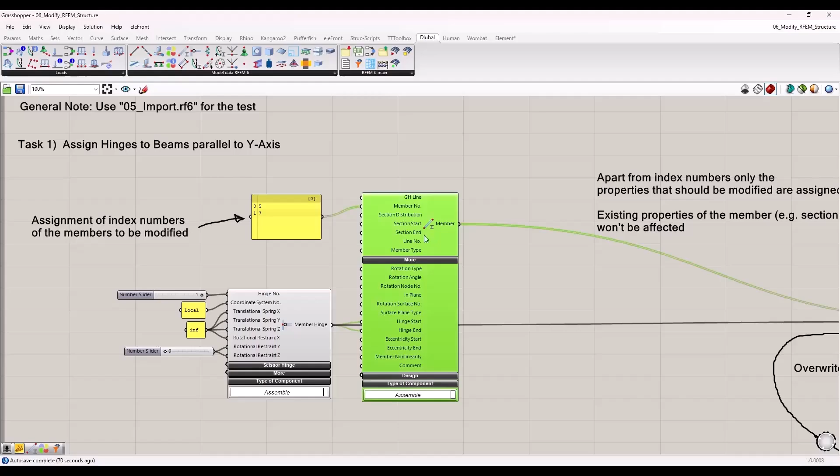Basically, we have to use a member component for that case here, because I want to modify my member, and then I need the member component. I tell my member component it should apply my changes to index number 5 and 7. I want to modify member number 5 and member number 7. And then I only apply the changes that I want to have. In this case, I plan to extend them with a member hinge on both sides.

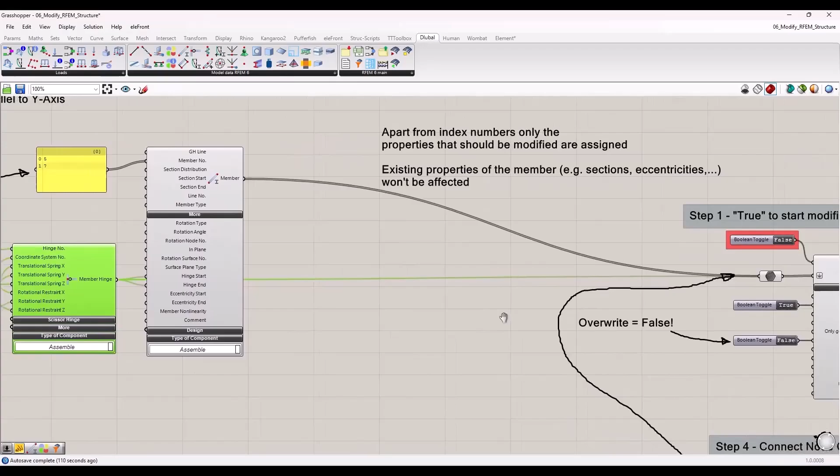It is not required to define all the other information again, the section, the eccentricity, which is assigned to these members. It's not required. You only assign what you want to modify or what you want to add. Then you connect the component again with the export component.

I think that's clear. And here you make sure to set overwrite to false. Again, if you set it to true, then your structure would be overwritten during the export. That's not ideal. Set that to false, and that's all you need to do. That is starting a modification in RFEM, and I can show that as well.

So now it's writing these hinges to the members, as you can see. The rest is still the same member, with the same section. The eccentricities, everything is untouched. It just added the hinges here. That is task 1.

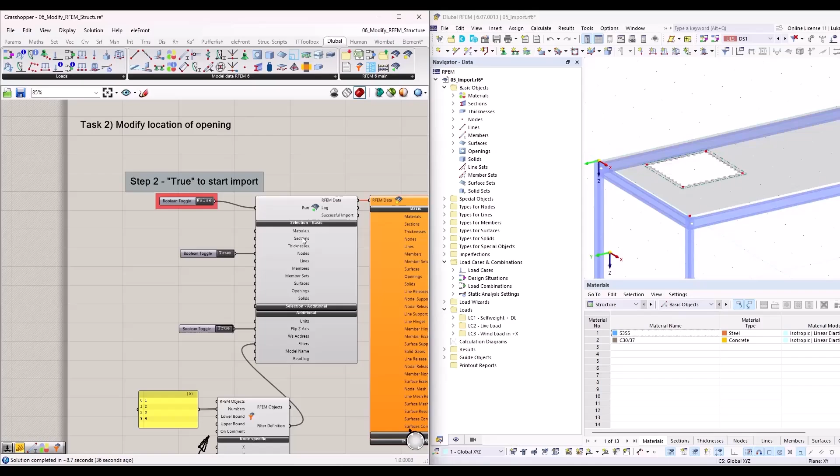Task 2 should be to move the opening parametrically through the slab. How can we do that? Well, there are various ways. I want to basically read the coordinates from RFEM into Grasshopper and then modify them. To do so, I use the import component similarly as before in example 5, just the nodes, and only the 4 nodes from the opening. I don't care about the others here, so I'm using a filter.

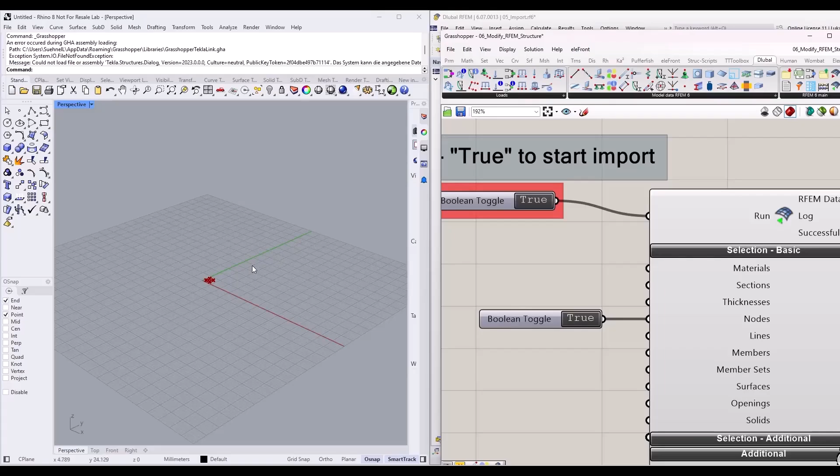Then I split the data package up into the nodes. I extract the Grasshopper nodes. We can see that here. Oh no, I didn't run the import. Just a second, now I run the import. Okay, so those are the 4 nodes that I just imported.

And then I basically modify them. In my case, I move them with the MD slider, so I can easily move them around to the expected new location. Then I use again a node component to which I assign the index numbers of the nodes I want to modify. Actually, I could have connected that panel also to this component, I somehow copied it, but it's the same content. Then the Grasshopper node input with the nodes I just copied, with the move component. So basically, I tell my component the new location of those 4 nodes comes from Grasshopper, from that component.

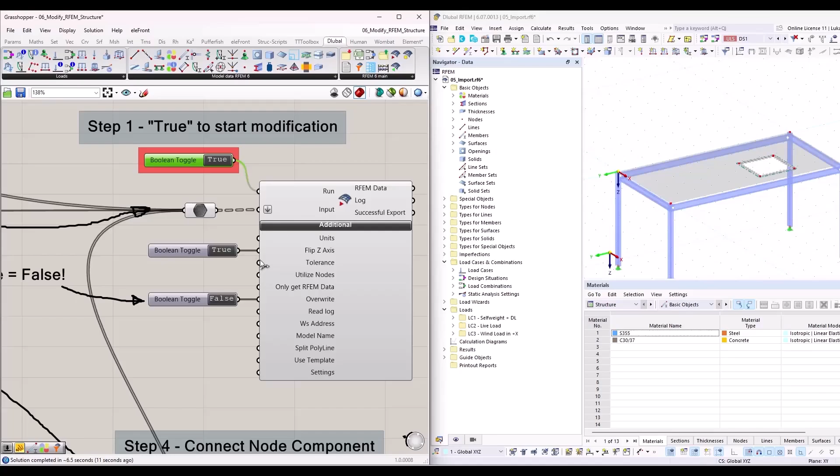Then I need to connect that as well to the export, it's not connected yet. And can I move it? No, I hope we can see it live. Then it will automatically run. Yeah, it's already done, because I left the export open, basically. It started the export directly, and it moved the opening from the left-hand side to the right-hand side.

It's like a live link now. So whenever, let me do it this way, when I move this now to another location again, then we should see it moving to the new location. So you can modify an active structure via Grasshopper. The key is to set the overwrite to false and assign the index numbers of the objects that you want to manipulate. That's all.

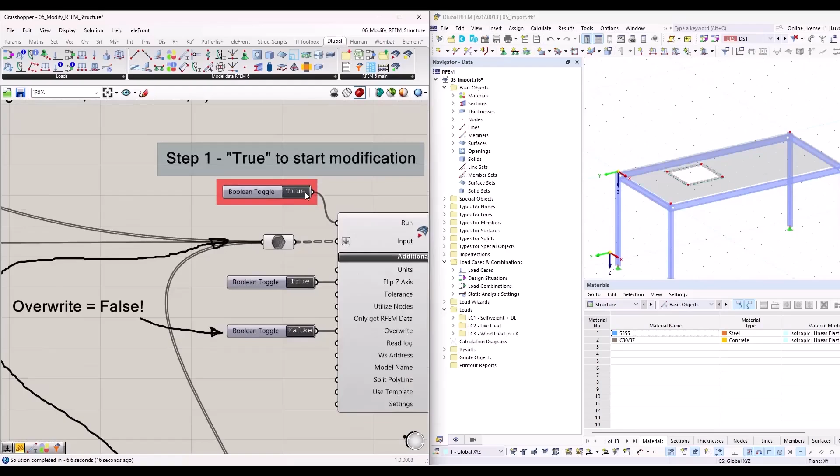Okay, that was the last sample file for today. As a little recap, for those who haven't seen it before or are interested, I wanted to show the capabilities of our Grasshopper plugin. You were able to see that we can export model data, load related data, the loading as well. We can run calculations, export results, import them again. In general, we have an import from RFEM into Grasshopper. So I think the main tasks or components are included, so you can cover the structural, analytical models that you do on a daily basis.